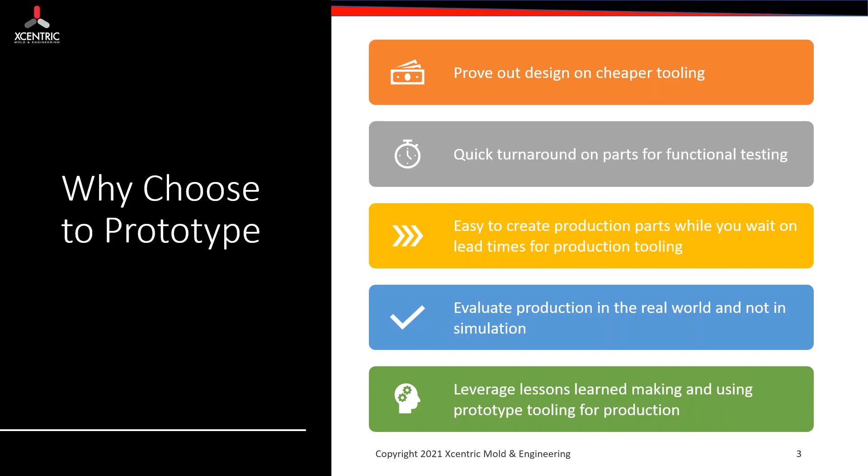So, the types of prototyping and when you want to use them. We start out with 3D printing. Typically, you're looking at 1 to 10 pieces. You're just doing a feasibility check of the design to make sure that everything's good. You really want something to hold in your hands to make sure what you've designed in CAD, what's on that drawing, is really what you're looking for, and fit some of those pieces together.

Some of the concerns with 3D printing are that the surface finish isn't going to match up, and the material isn't going to be exactly what you have on your parts. And really these are for much lower volume, because the cost when you try to go much higher is going to be too high compared to some of these other options.

The next one's cast urethane. Again, this is for lower volume, when you want more pieces closer to what you're going to get with injection molding. You're going to be in that 10 to 100 range. These parts have a surface finish, so they're going to be very comparable, if not the same, to injection molding. They're great for marketing because they're going to look great, and also for functional testing.

These are going to be much stronger than what you're going to get from 3D printing. So you can do some more of that testing on these when you're not quite ready to move into full prototype injection molding. And then once you get into that, we're looking at prototyping up to 2,500 pieces and then low to mid volume range production, bridge tooling, kind of that 25,000 range, 25 to 50,000 range.

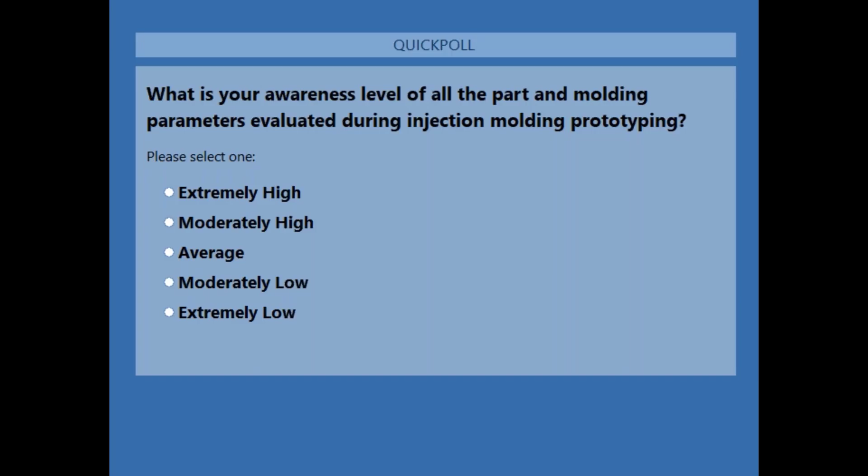All right. So it seems like a lot of people here have at least some understanding of what these are and what you're looking for. In the next slide, we're going to start diving deeper into this. We're going to look at some of the part features. We're going to start really looking more at what we're looking at and what we're evaluating.

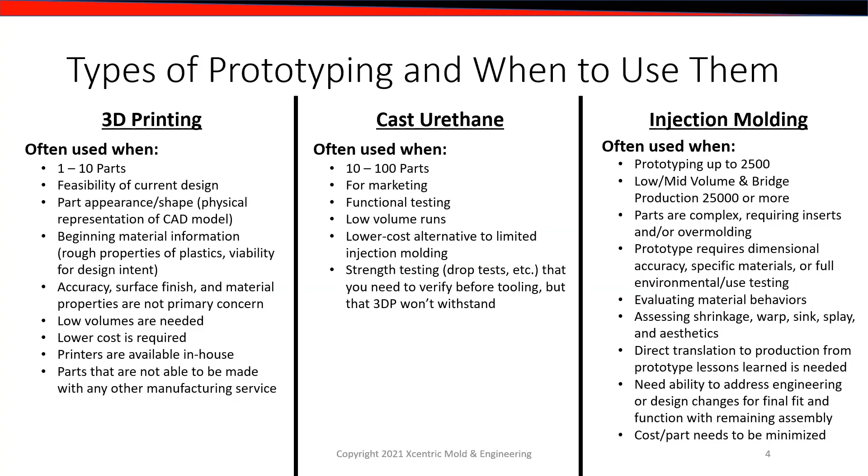So some of the part features we review in prototyping. This is going to be not only in the molding aspect of it, but it's going to be prior to that. A lot of the DFM work that we're going to work with you directly on, trying to get your parts to the state where you have a really good part for manufacturing. So the first one's undercuts.

What we do is typically a lot of hand loads on undercuts. So instead of the full automatic slides that move whenever the mold opens and closes, the way we do it is we will create a feature that when the mold opens, an operator can pull that out, pull these pieces apart. It really allows you to get every undercut that you designed. You're able to see if it works, if it's going to be sticking, if it's going to lead to any issues ahead of time. And we can simulate all that in our prototype tool.

Now, there's two different ways to look at it: internal and external undercuts. Both of these we're going to do with hand loads in-house. But when you get into the production tool, the automatic slides start to add size onto the mold. So really evaluating if you need all these undercuts on it, and if this mold, once you move into a 4, 6, 18 cavity tool, is really going to cause problems in mold size, if you're going to have to go up to a larger molding machine. A lot of that stuff can be evaluated beforehand in prototyping, so that way once you get into production, you kind of know what you need and what it's going to look like.

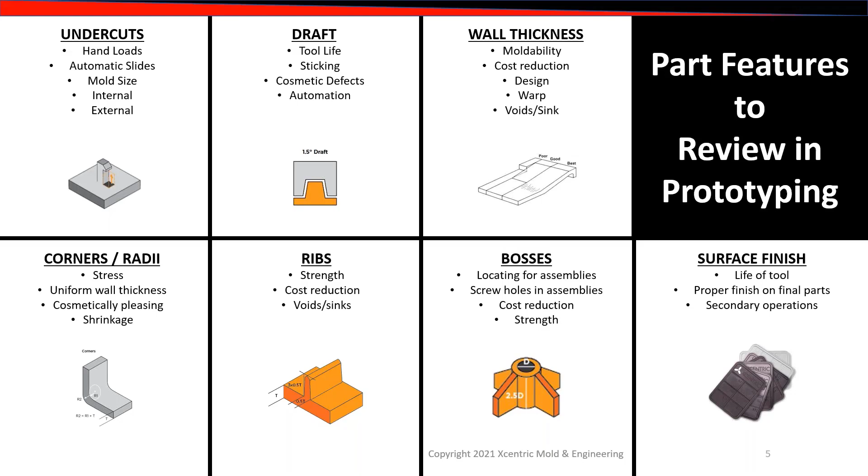All right, so we kind of looked at some of the features of the part itself. Now we're going to start looking at the features in the mold, the way the mold's designed, and we'll get into some of the automation that goes along hand in hand with this. So some of the gate types, these are just a few. There's pretty much any gate that you can think of out there that can be used for different applications.

And next is the tab gate. So a tab gate, an edge gate, a fan gate, they're all within the family. A tab gate has a very specific use to it compared to some of the other ones. It's very good for thin parts, the way it reduces shear of the plastic through the gate. So you see this a lot more on polycarbonate, acrylic, really clear pieces. That way you're not seeing any shear of the plastic when it goes into the piece.

Next is edge gate. This is kind of the catch-all be-all of gating for plastic molds. It is the one that we use most, and we can do all of them, but edge gate is typically the one that we use for most applications. It's a very generic gate that can do everything. It's not great at anything, but can do everything that you need it to do.

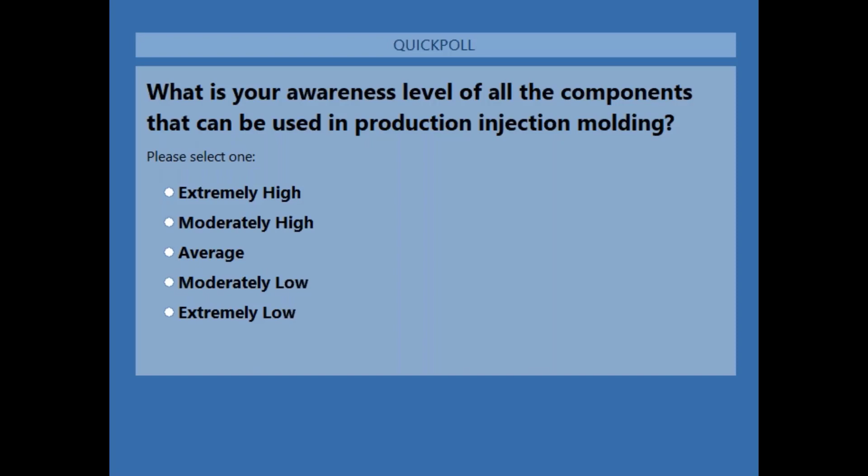All right, so now we're going to move into another question, and I'm going to launch it now. So what is your awareness level of all the components that can be used in production injection molding? All right, we're going to have 10 more seconds and I'll shut it off. All right.

So it seems like everyone at least has some familiarity with the different things. I'm going to show a few on the next slide. Some of the ones that I like, some of the things that we do internally that then will be automated fully in the next step of it.

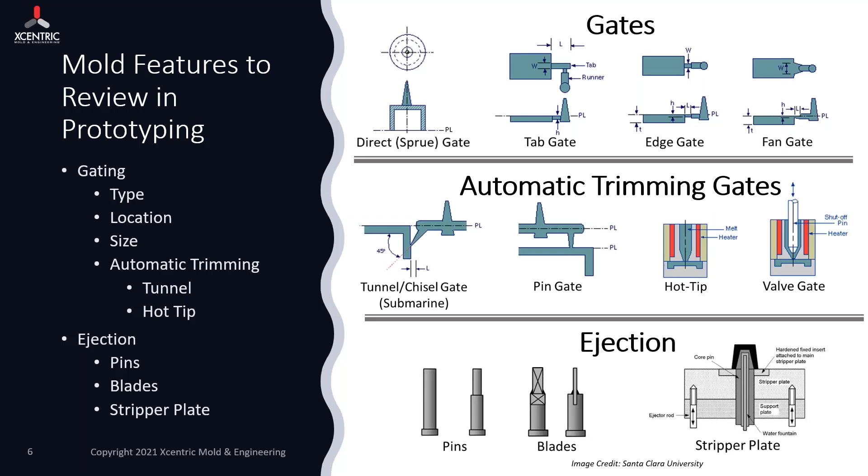All right. So the first one, slides. So I talked about it earlier and talked about how we do hand loads. So hand load again is an operator physically pulling the piece out with metal around it to form some of those undercuts or features that can't be done in a traditional open and closed type mold. Once you get into production, you don't want that operator standing there. You don't want added cost into that final piece. So you start adding slides. So really, when the mold opens, things start to pull apart that allow the piece to have those undercuts automatically removed, and then a robot to come in and pull the parts, or the parts to drop down onto a conveyor belt underneath.

The next one's a collapsible core. So again, we do it with a hand load, have the operator pull it all out. But in a full production mode, you have a pin that will pull down and actually collapse the metal core. These are used on, think bottle caps, any internal undercuts that you can't really get to any other way that would be in a cylindrical type form. You use that collapsible core to pull that apart and get those pieces off.

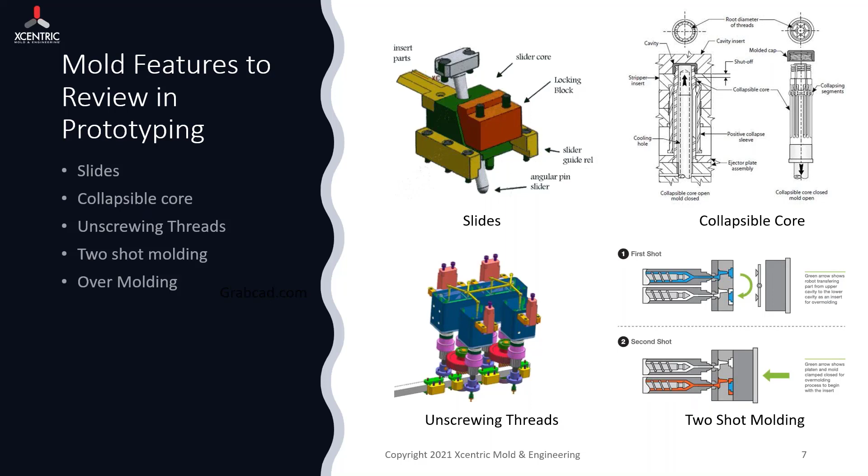Now we've kind of reviewed some of the features of the part, what we looked at internally, and now we're going to look at some of the pieces that are added on after the fact to automate your final design. So robotics. A sprue picker is the most basic form of robotics. It comes in, it grabs the runner system, pulls the piece out and drops it either on a conveyor or into a bin, whatever it may be.

And then you get into a little more advanced, a 3-axis robot. With these, you then build a plate onto the face of it to go into the cavity and grab each one of those pieces. So it can be little suction cups that'll go in and grab it, or actual little fingers that'll grab each piece individually. And this is great on some of those higher applications, or when you're moving that piece over into an automated packaging cell, or any of these other applications where you need a task to be handled and don't want an operator handling that task.

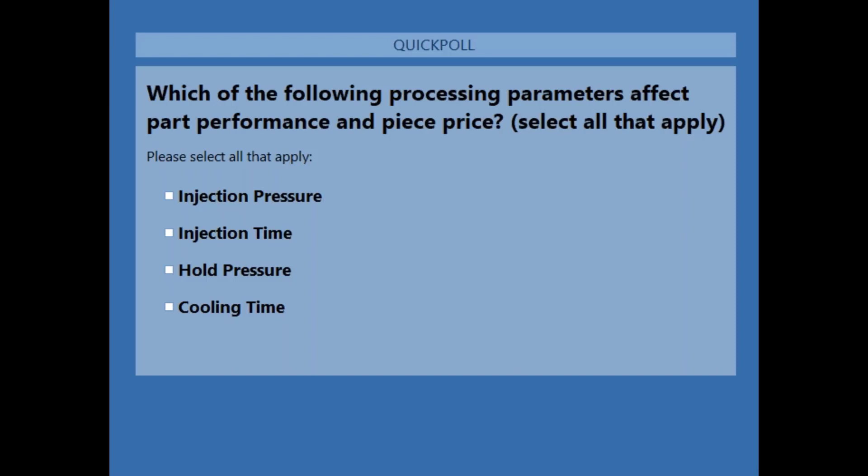All right, we'll give it about 10 more seconds and then I'll shut it off. All right. So it looks like everyone got it right. We'll move into the next slide and I'll give a little more details on the results of this.

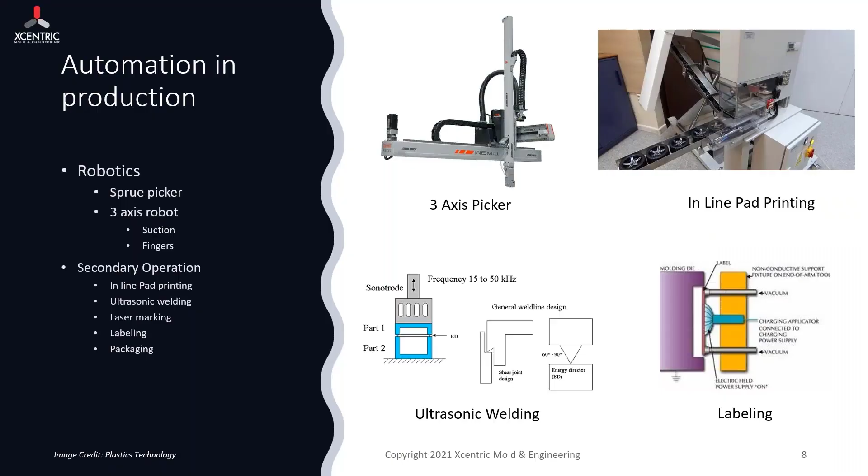So processing parameters to review in prototyping. So like I said, it's all of them. Really every aspect that you can look at, every detail that you can get out of something is going to be valuable to moving it forward to the next stage and producing the part that you want in the long run. So injection pressure. You're always going to have variations in injection pressure. That's just the way the process is. What is great is limiting that variation and bringing that process to where it's controllable variation and you know what is going to make good pieces and bad pieces.

For injection pressure, maxing out the machine is huge. So when we're prototyping, we're making sure that we're keeping our injection pressure at a reasonable amount, because if not, then you're going to run into issues when you're trying to go to production and you want to build a larger mold. If you're maxing it out on a one cavity small mold, you're definitely going to run into those issues moving into a higher cavitation. And a lot of the things that we can do with this is start changing runner sizes or looking at the piece to make sure that everything's good. And we can make a lot of those changes in prototyping, prove out everything you want to do, and then take all of that with you over to production.

Injection time. So injection time is going to play into shrinkage of the part. If you have a very long injection time, you're going to have that difference in temperature of the plastic inside of it, and it's going to be different in shrinkage, whether it's at the end of fill or beginning of fill, and that can lead to warping of the part and can lead to other defects. You want to create a repeatable process. Everyone is always going to say that repeatable process on everything. So bringing in an injection time that's repeatable on every single one of them, then you know that the part coming out is going to be the correct piece.

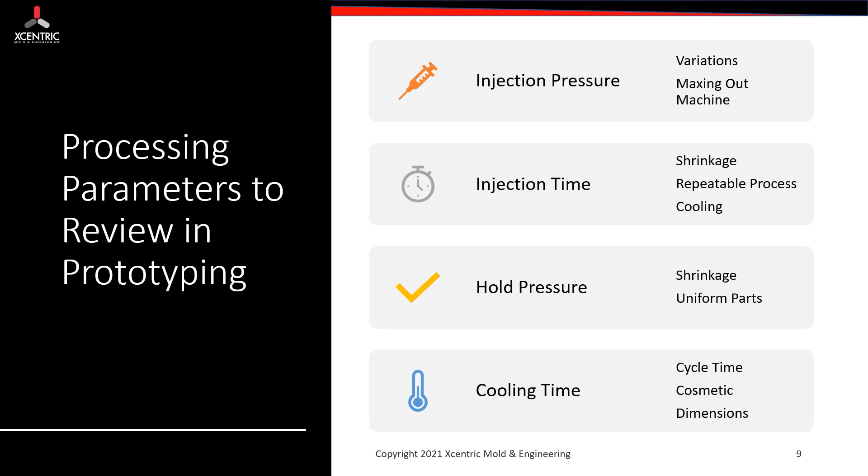The next piece is a medical part with slides, a stripper plate, single gated, and what's really important about this piece is typically when you have a large cylinder piece with a hole running through it, you don't want to use a single gate on a side, because what will happen is you will start injecting, and that pin that is in there free standing will start to deflect a little bit, and this will affect the center diameter of the part.

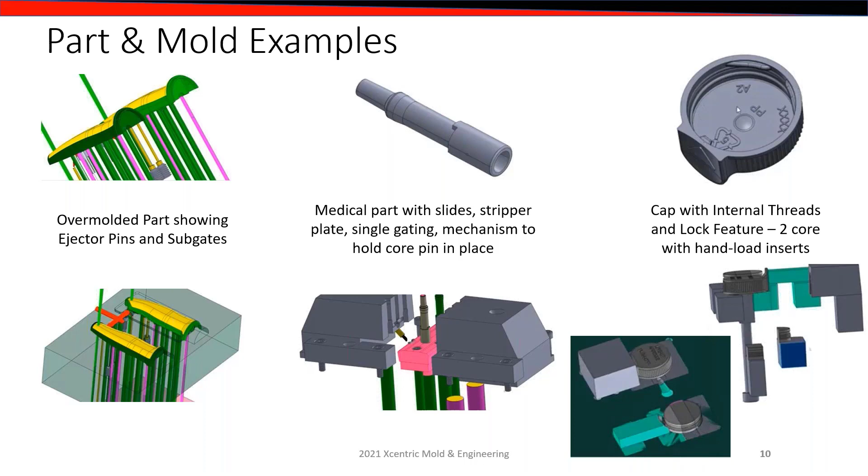And with this specific application, we made a 2-cavity mold, but what we did was we shot the first side, proved out the process that we wanted, and then came back and opened the second side, and everything that we figured out on the first side moved to the second side. And we were able to use this for a bridge tool, helping them get to a full production tool later on.

All right, so we kind of reviewed all the different features, whether it be part design early, some features in the mold, automation after the mold, and some of the processing parameters. These are all the things that we're working with and going through in prototyping, and all the efforts to move into production. And one of the things I do want to point out is that we actually do some production in-house. Some of the benefits: we have the knowledge of the product because of the prototyping effort. So there's no transfer of data to anyone from machine to machine. We've done all this work. We know how the part runs, and we can help with some of these lower production volumes.

Another big thing is sometimes we can use that same mold that we use in prototype to actually do production. It's not applicable in all cases, but I would say a large number of them, we can use that prototyping mold. And the way we can do that is we offer a lifetime warranty on those molds. So as long as the part runs at our facility and an order is placed within 2 years, then we can offer that lifetime warranty and run those pieces. So what I like to say is we do bridge or low volume production, typically under 50,000, depending on the cases and depending on the piece, but we are able to do that.

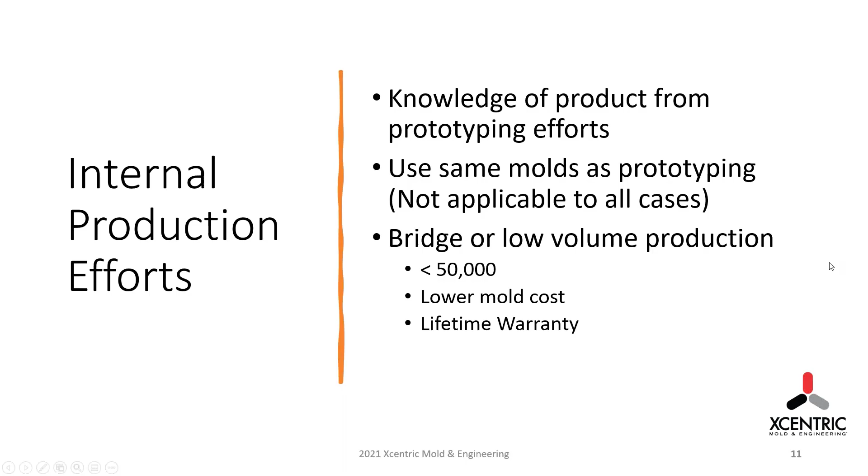All right, now just some of the capabilities we have. Injection molding, like I said, we can have parts to you in as little as 5 days, and that is from a PO being submitted, mold being cut, pieces on your door in as little as 5 days after that. Part runs, I said 50,000. We have it listed as 25,000. Really, it's a case by case type thing, so it depends on what the piece is. We can do up to 1.5 pound shot size, so some pretty large pieces. We can do single cavity, multi-cavity, tons of different options.

And then we have 55 ton to 300 ton electric presses, so we can do a variety of sizes, parts up to 2 feet by 2 feet by 5 inches in depth. CNC machining as well, parts in as little as 5 days. Part runs anywhere from 1 to 100 to 1,000. Really, we're open to all cases.

We can hold pretty high tolerances, plus or minus 0.005. Do a variety of different materials, metals, plastics, different surface finishes. We can do ion plating. We can do a slew of different things. And then rapid prototyping. We have a slew of different rapid prototyping options, whether they be 3D printing like our SLA, SLS, multi-jet, or some of those higher volume ones that you want to do, the cast urethane as well.